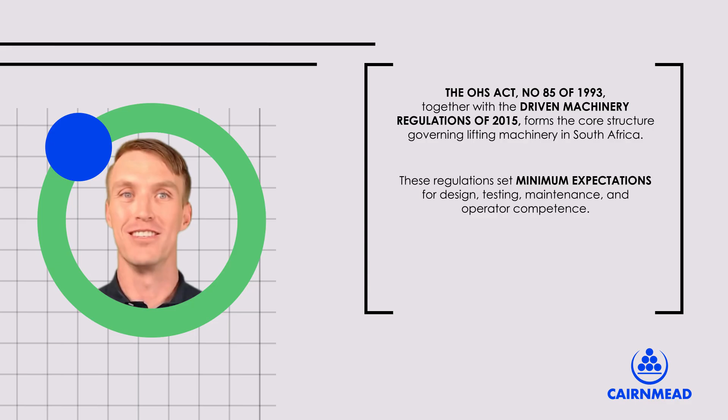Our first anchor point is the legal framework. The OHS Act, number 85, 1993, together with the Driven Machinery Regulations of 2015, forms the core structure governing lifting machinery in South Africa. These regulations set minimum expectations for design, testing, maintenance, and operator competence. They ensure that lifting machines aren't merely convenient tools, but legally compliant systems with traceable safety records.

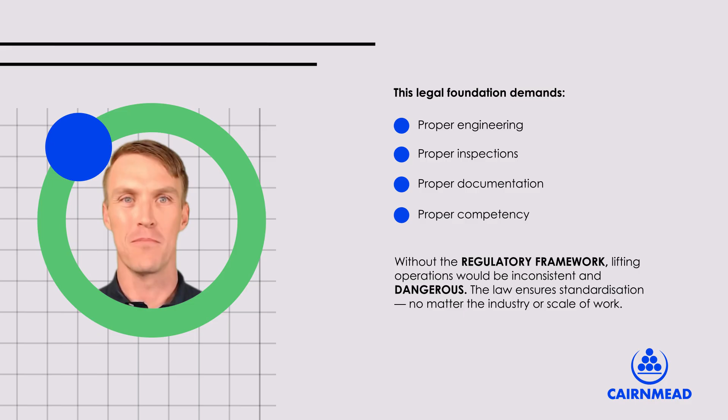This legal foundation demands proper engineering, proper inspections, proper documentation, and proper competency. Without the regulatory framework, lifting operations would be inconsistent and dangerous. The law ensures standardization, no matter the industry or scale of work.

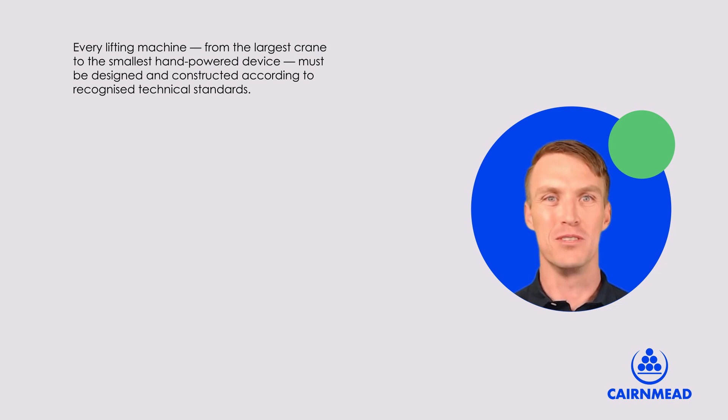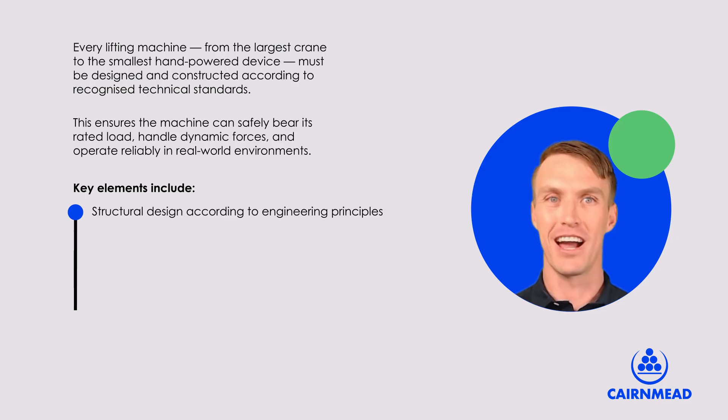Every lifting machine, from the largest crane to the smallest hand-powered device, must be designed and constructed according to recognized technical standards. This ensures the machine can safely bear its rated load, handle dynamic forces, and operate reliably in real-world environments. Key elements include structural design according to engineering principles, material suitability and durability, load-bearing components meeting certified specifications, and safety devices included where required.

Design compliance prevents catastrophic mechanical failure. A lifting device is only as strong as the engineering behind it, and these standards ensure that strength is predictable and consistent.

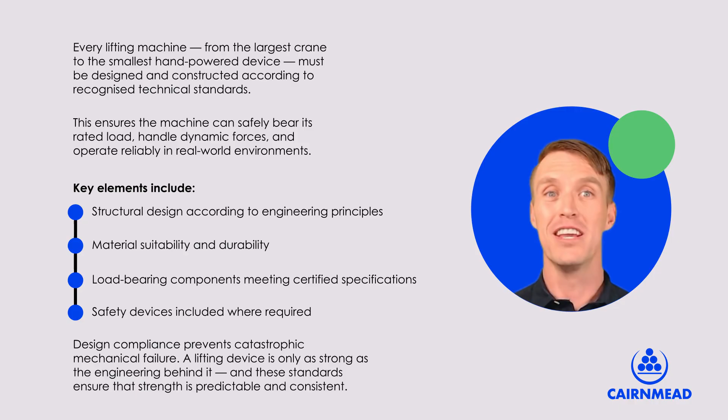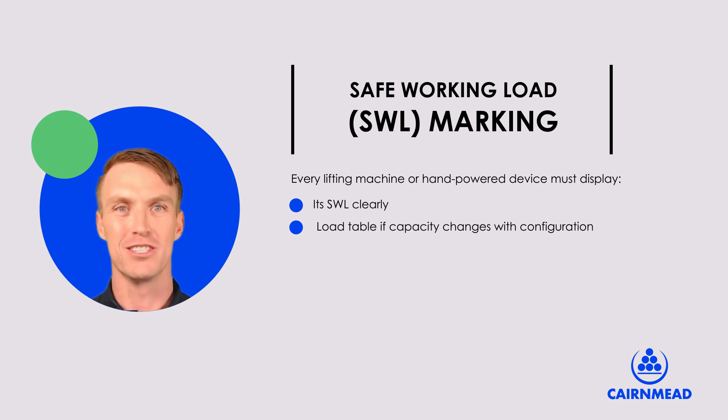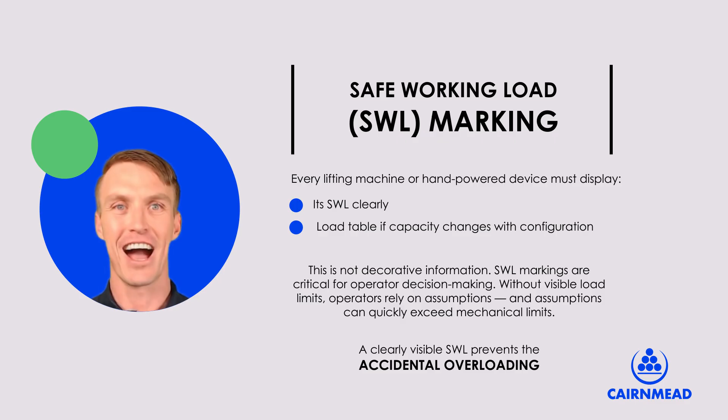One essential design requirement is the Safe Working Load, SWL marking. Every lifting machine or hand-powered device must display its SWL clearly or a load table if capacity changes with configuration. This is not decorative information. SWL markings are critical for operator decision making. Without visible load limits, operators rely on assumptions, and assumptions can quickly exceed mechanical limits. A clearly visible SWL prevents the accidental overloading that leads to structural and equipment failure.

Testing and inspections keep lifting equipment reliable over its lifespan. The Driven Machinery Regulations require annual performance tests and thorough examinations by a certified inspector, and 6 monthly inspections of hooks, ropes, safety mechanisms, and slings by a competent person, but inspections alone aren't enough.

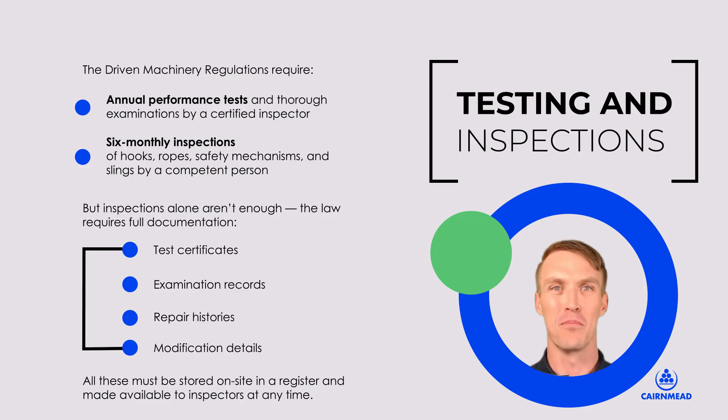The law requires full documentation, test certificates, examination records, repair histories, and modification details. All these must be stored on site in a register and made available to inspectors at any time. This creates a clear, auditable trail, proof that the equipment remains safe and legally compliant between operational cycles.

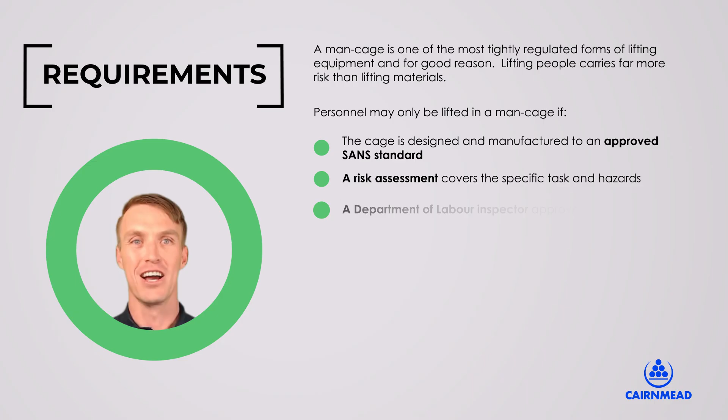A man cage is one of the most tightly regulated forms of lifting equipment, and for good reason. Lifting people carries far more risk than lifting materials. Personnel may only be lifted in a man cage if the cage is designed and manufactured to an approved SANS standard. A risk assessment covers the specific task and hazards. A Department of Labour inspector approves the cage's use, and the Department of Labour is notified per site.

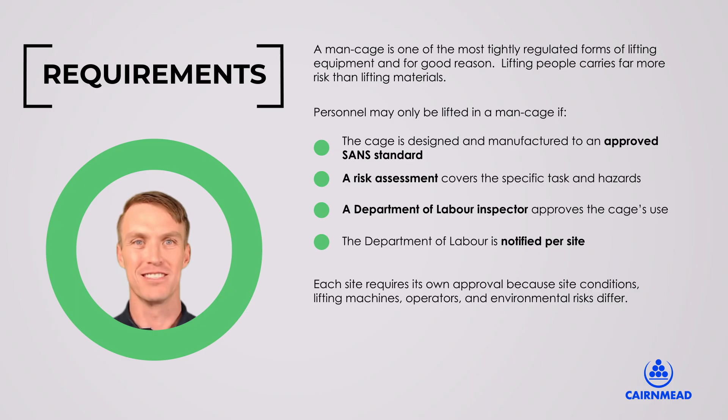Each site requires its own approval because site conditions, lifting machines, operators, and environmental risks differ. Man cages are inherently higher risk solutions, which is exactly why their requirements are far more stringent than normal lifting devices.

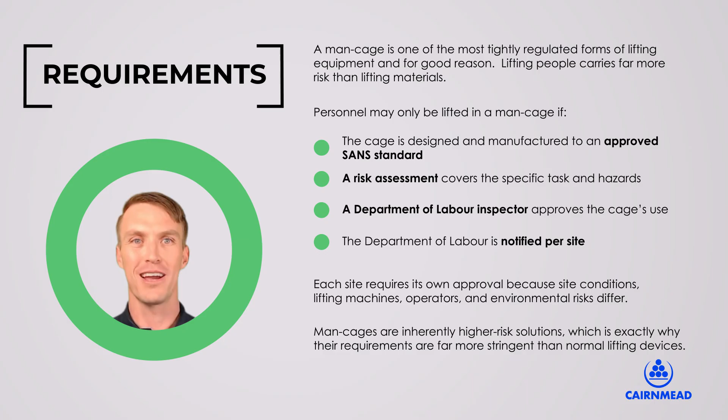According to SANS 583/2015, man cages should not be used for routine tasks. Instead, the standard recommends mobile elevating work platforms because they are purpose-built to lift people. They include engineered stability controls.

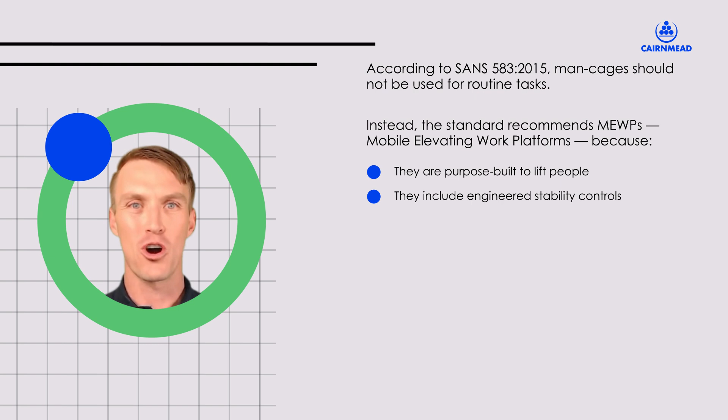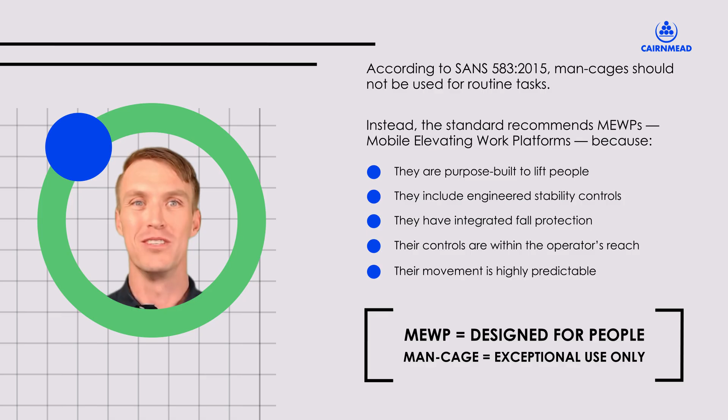They have integrated fall protection. Their controls are within the operator's reach, and their movement is highly predictable. Man cages suspended from cranes lack these controls, making them unsuitable for everyday work at height tasks. So, MEWPs are designed for people, man cages are exceptional use only, and the legislation reflects that.

Hand-powered lifting devices include chain blocks, lever hoists, and ratchet hoists. They are extremely common tools because they are simple, strong, reliable, and require no electricity or hydraulics. Their manual operation does not reduce their lifting power.

Many can lift tons at a time, which means they require just as much care and compliance as motorized lifting machinery. These devices use gears, hooks, and chains to multiply force, making them particularly useful in constrained spaces or environments where cranes cannot reach.

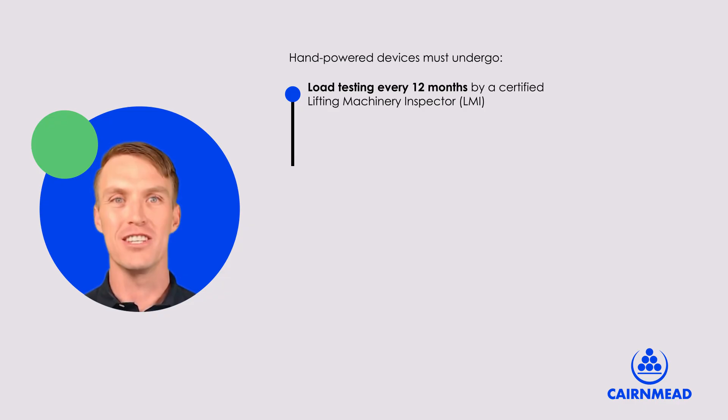Hand-powered devices must undergo load testing every 12 months by a certified lifting machinery inspector, routine visual inspections before use, and have visible SWL markings.

Operators also need to ensure chains are not twisted or damaged, hooks are not bent, safety latches function correctly, and the device has not been modified. These basic checks prevent mechanical failure and ensure the device performs exactly as intended under load.

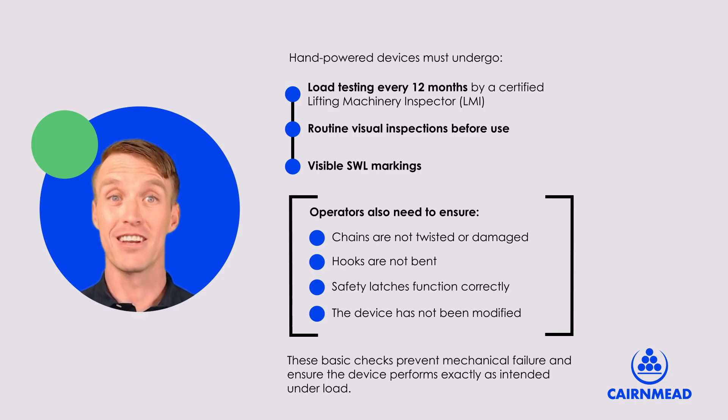Even perfectly tested equipment becomes dangerous if attached to a weak structure. One critical rule to keep in mind: the supporting structure must be strong enough to handle the applied load. A chain block rated for 2 tons remains dangerous if hung on a beam that can only carry 1 ton.

Operators must understand not only the device's capabilities, but also the load-bearing capacity of the structure supporting it. This often overlooked detail is responsible for many lifting failures on sites.

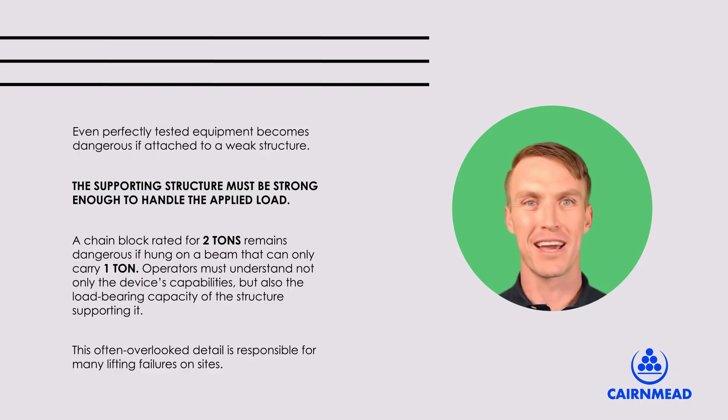Earth-moving machines like TLBs and excavators are not designed to function as lifting machines. The Driven Machinery Regulations exclude them for a reason. Their intended use covers digging, loading, trenching, and pushing.

However, due to site practicality and sometimes necessity, many contractors use them to perform lifts. This is where the rules become critical. Because the machines were not built as lifting devices, the risk increases dramatically if they are used incorrectly or without proper inspections.

If earth-moving machines are used to lift loads, they must comply with the same rigorous standards as formal lifting machinery. This includes annual load tests, 6-monthly inspections, load-tested hooks and attachment points, and operator access to a manufacturer's safe load diagram. Without these controls, the machine may become unstable, tip, or exceed its hydraulic capacity.

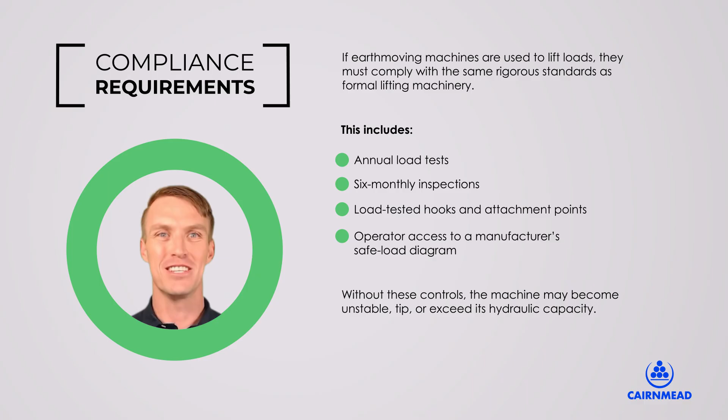The load chart is essential because an excavator's lifting ability varies drastically depending on reach, boom angle, machine posture, and slew position.

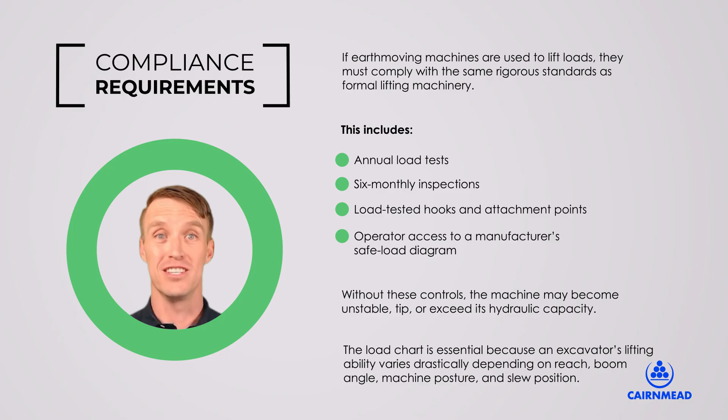Load charts remove guesswork. They ensure that operators know exactly what the machine can handle, preventing tip-overs and structural stress. Key insights include: a machine can safely lift much more close in than at full reach. Hydraulic limits decrease the farther the boom extends, and stability changes depending on ground conditions and slew direction.

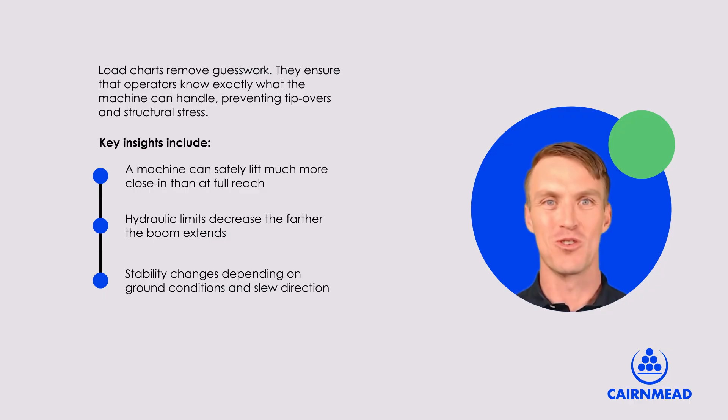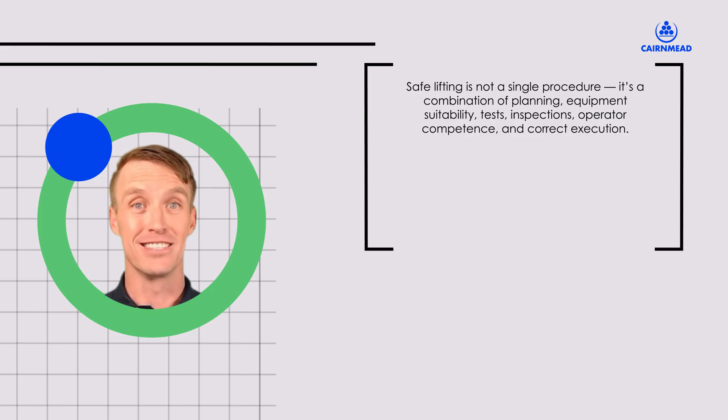Safe lifting is not a single procedure. It's a combination of planning, equipment suitability, tests, inspections, operator competence, and correct execution. When done correctly, lifting becomes a controlled, predictable process. When shortcuts appear, failing to perform inspections, ignoring SWL markings, bypassing safety controls, or using the wrong equipment, incidents follow.

The purpose of the regulations is simple: to keep people alive, protected, and capable of completing work safely. The combination of regular testing, compliant equipment, safe attachment points, and correct lifting methods creates a safe operating environment for everyone involved. From lifting machines to hand-operated devices, from man cages to MEWPs, from excavators to safe working loads, every element has a place, a purpose, and a legal requirement.

When we respect these requirements, lifting operations are safer, more efficient, and more professional. When we ignore them, we risk property, reputation, and most importantly, people's lives. Thank you for watching, and stay safe during all lifting activities.